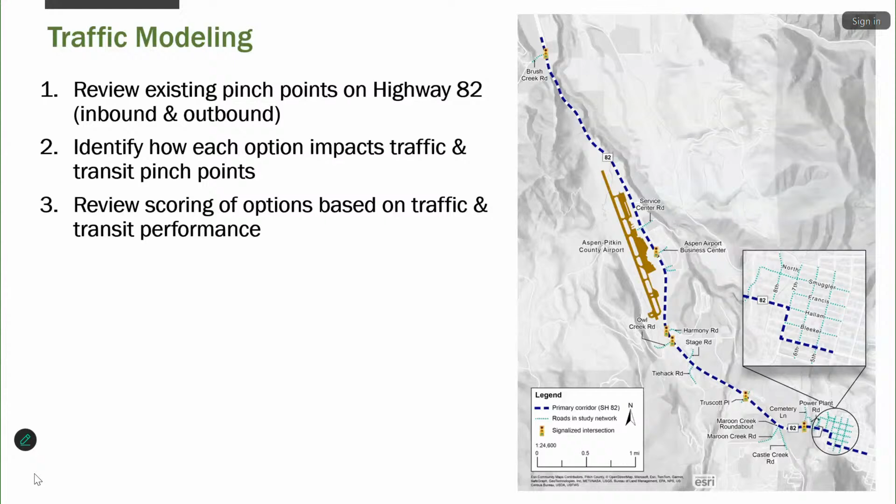So exiting downtown Aspen, going from right to left on this slide, the first primary bottleneck is a 1-lane merge after crossing 5th Street, which combines general traffic and buses into a single lane. This mixed traffic continues at a slow speed with several minutes of delay until hitting another 1-lane merge where the bus lane again begins slightly past the Maroon Creek roundabout. This 1-lane merge is the most critical outbound bottleneck due to the additional traffic demand originating from Cemetery Lane, Maroon Creek Road, and Castle Creek Road, all merging at the roundabout to leave Aspen.

Shifting our focus to the inbound direction, this queuing occurs across several morning hours. As general traffic enters Aspen, the first and most constraining pinch point is located where general traffic merges into a 1-lane section near Harmony Lane in order to accommodate the inbound bus lane that begins around the airport. Inbound traffic and buses merge again at the roundabout and continue to move at a slow speed until going through 2 90-degree turns at the S-curve. This 1-lane merge near Harmony Road effectively meters traffic and allows buses to continue free flow through heavy queuing.

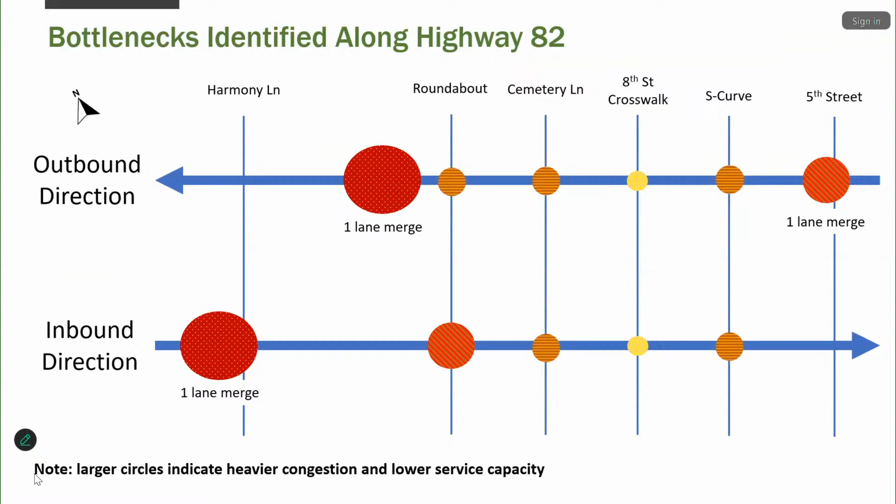Okay, can go to the next slide then. Option 1 primarily provides transit lanes through the S-curve as Highway 82 transitions from Hallam Street to 7th Street to Main Street. It also features slight modifications to 7th and 8th Street access to and from Highway 82 to help alleviate some of the friction through the S-curve for general traffic and buses.

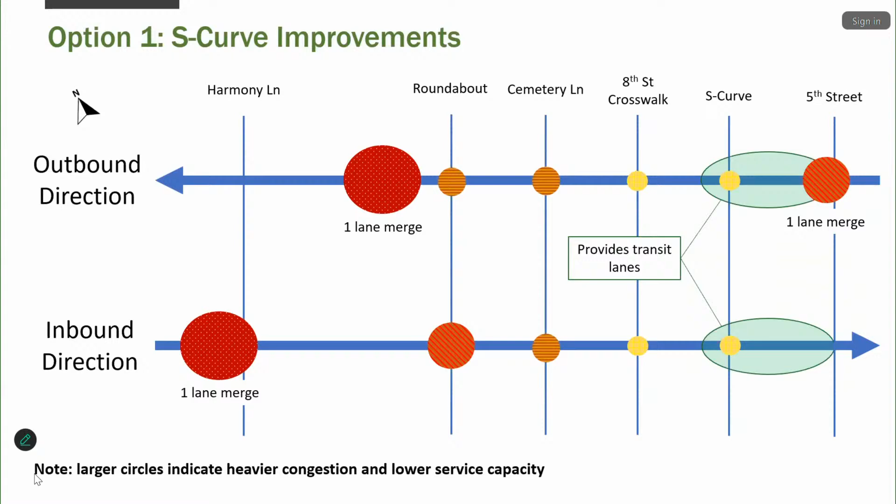Option 2 builds on option 1's transit lanes through the S-curve and extends the bus lane in the outbound direction. Option 2A extends bus improvements to Cemetery Lane, while option 2B extends bus improvements through the roundabout with a bus bypass. Note that separating buses from general traffic also helps general traffic flow slightly better.

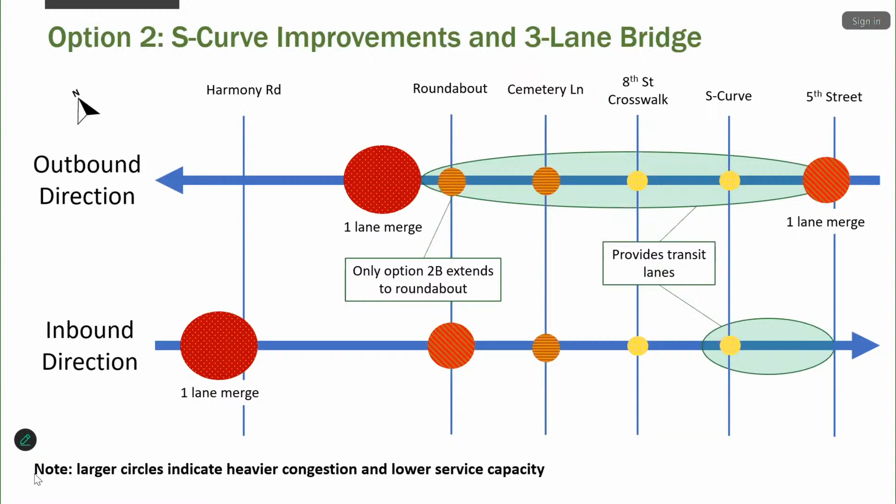Option 3 is the Phase PA, which removes several pinch points and adds transit lanes between 5th Street and the roundabout. The Phase PA also features a signal at 7th and Main Street, which is effectively a relocation of the signal at Cemetery Lane. Notice that the pinch points that the Phase PA removes are not the most critical and constraining bottlenecks, so general traffic conditions do not experience drastic improvement under the Phase PA as it's currently designed.

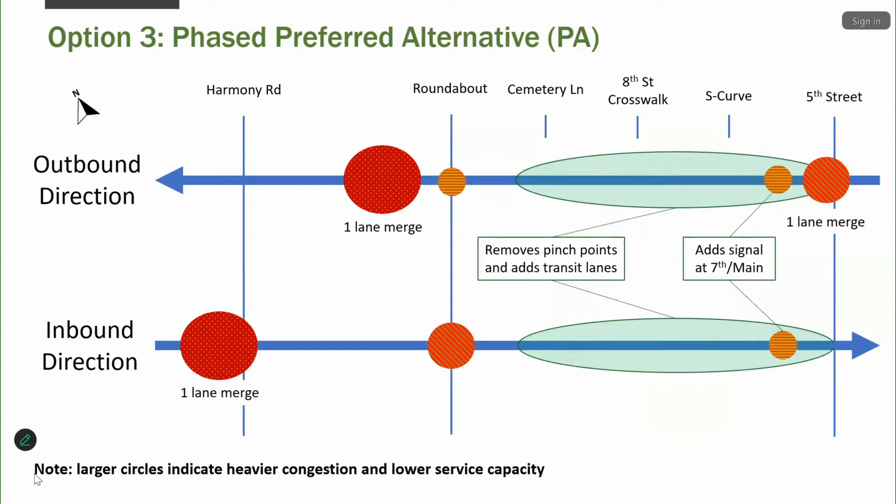However, there are strategies that could be explored to provide more traffic capacity for this option. Option 4, similar to the Phase PA, the split shot option removes bottlenecks in the inbound direction. Contrary to the Phase PA, it maintains connections to those existing bottlenecks for the outbound direction and softens the S-curve as well. Notice that roundabout queuing is worse under the split shot, but note that there are other solutions that could be explored to improve split shot operations.

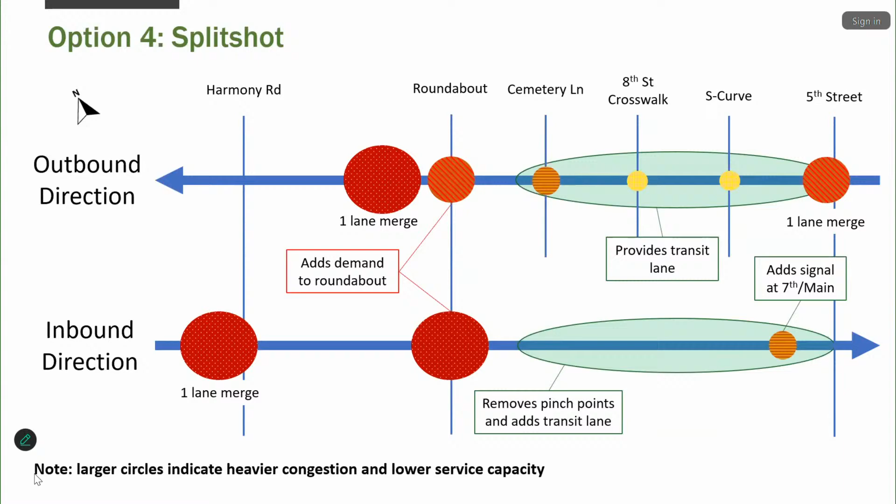Option 5 considers down valley improvements to the northwest of the limits of options 1 through 4. The primary strategy considered here was to improve conditions in the outbound direction, primarily due to the impact that outbound traffic has on Aspen streets and community.

This solution explored converting 0.4 miles of dedicated bus lane to a general traffic lane, in an effort to continue two general traffic lanes further north of the roundabout to increase the outbound throughput of the Maroon Creek roundabout. It's important to note that this would require a supplemental EIS at minimum.

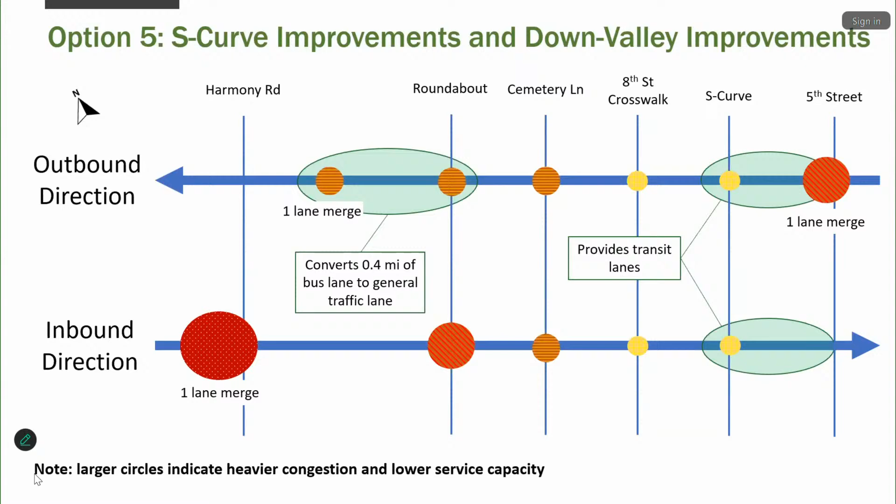To summarize traffic and transit performance of the options discussed, our team scored each option's effectiveness in addressing existing and future congestion issues. The scoring is on a scale of 1 to 5, with a score of 3 performing similar to the no build, a score of 1 to 2 performing worse than the no build, and a score of 4 to 5 performing better than the no build.

Option 3 scored the highest due to the removal of existing bottlenecks in both inbound and outbound directions. Option 5 scored the next highest due to its effectiveness in reducing outbound traffic congestion, thus improving bus travel times as well. Option 2B scored the next highest, followed by option 2A, then option 1, and finally option 4.

The split shot performed the worst due to its negative impact at the Maroon Creek roundabout. However, again, there are potential solutions available to investigate improved split shot operations. There are numerous variations to all of these options that can be considered to improve traffic and transit even further. This exercise was an initial look at roadway operations, and now that we have a traffic model available, future testing can be performed efficiently. If the council wishes to explore more variations, that can be done through a supplemental EIS.

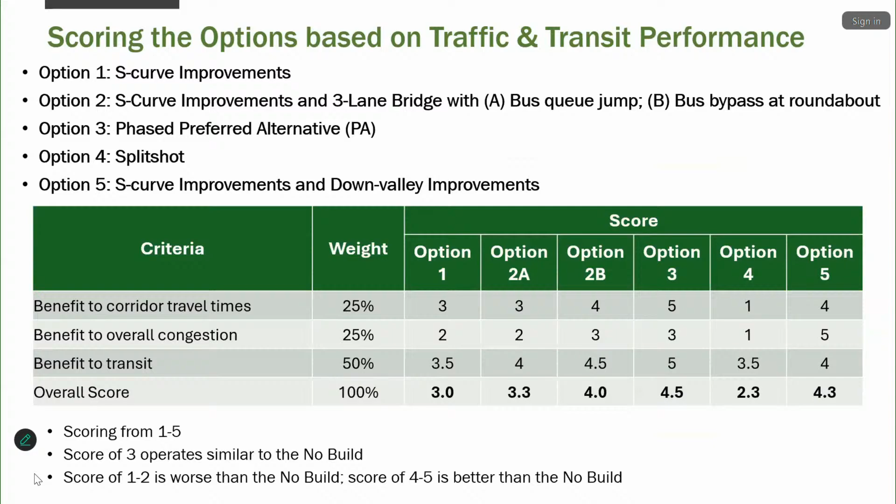Question there. Thanks, this is helpful. Could you remind me, option 5, what's contemplated with the bridge in option 5? The existing Castle Creek Bridge.

So this would only include the S-curve improvements associated with option 1. It would still have a 2-lane bridge. Maintained a 2-lane bridge. Thank you.

And I believe you said that a supplemental EIS would be required in option 5. Could you help me understand why that's the case if we're keeping the status quo? It would be due to the removal of that 0.4 miles of bus lane just beyond the roundabout, down valley of the roundabout. Down valley, thank you.

John, can you tell us how long a supplemental EIS would take? Well, I think it depends on the extent of analysis and how much public involvement might be required, but I think a good estimate might be between 1.5 to 2 years.

Thank you. You can hold your questions till your comment time. Thank you so much.

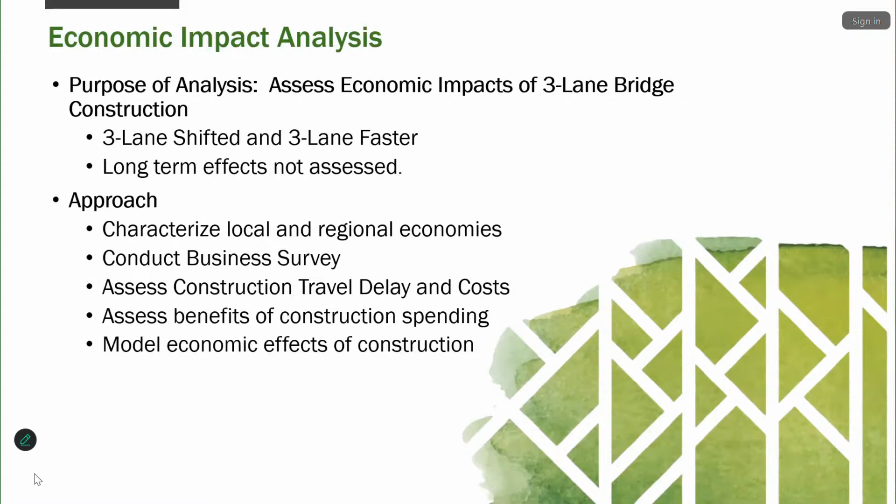Our approach, in short, involved characterizing the local and regional economies, conducting a business survey, assessing the travel delays and related costs, the benefits of construction spending, and modeling the economic impacts of construction. We'll talk about each of those in turn.

Starting with the business survey. The purpose of the survey was to get feedback from the business community and to help inform our economic model, which was an IMPLAN model. So we partnered with the Aspen Chamber. They were very helpful in helping us get out 100 surveys to business owners via email. City staff also helped by pounding the pavement and talking directly with businesses, reminding them to complete the surveys.

And we got good responses, 42 businesses responded. So I'll just go through the high points of some of the results. The more complete survey results are summarized in an appendix to our economic memo. But just to hit the high points, in terms of the types of businesses that responded to the survey, highest was retail at over 32%, followed by the food industry at 15%.

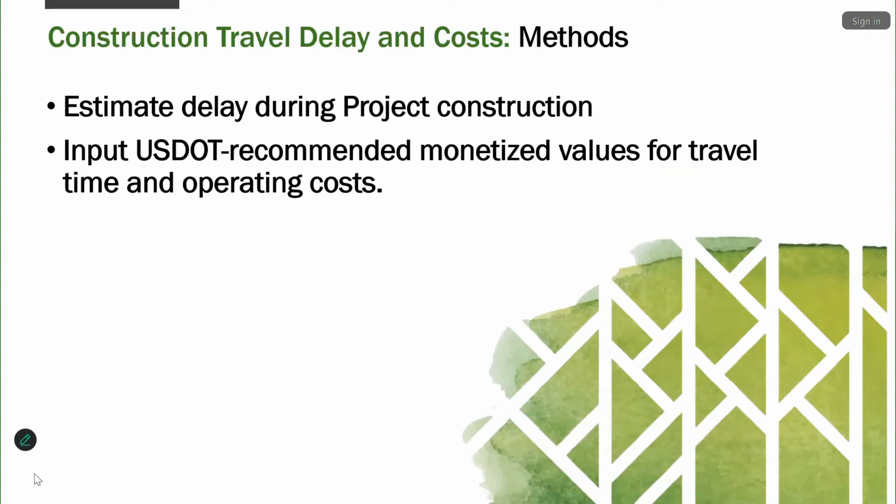So in the larger scheme of things, minor effects. But when you take a look at that over the span of a 3 or 4 year construction period, those delays do add up. We used USDOT methods and values to monetize those travel delays.

And the results you see here. These are annual numbers, vehicle hours traveled. They would total over 185,000 vehicle hours traveled of delay. When you monetize those, for both the 3-lane faster and 3-lane shifted alternatives, total values for the 3-lane faster option equate to over about 14.7 million, whereas the 3-lane shifted is approximately 19.3 million. The differences really are the result of the difference between a 3 or 4 year construction project.

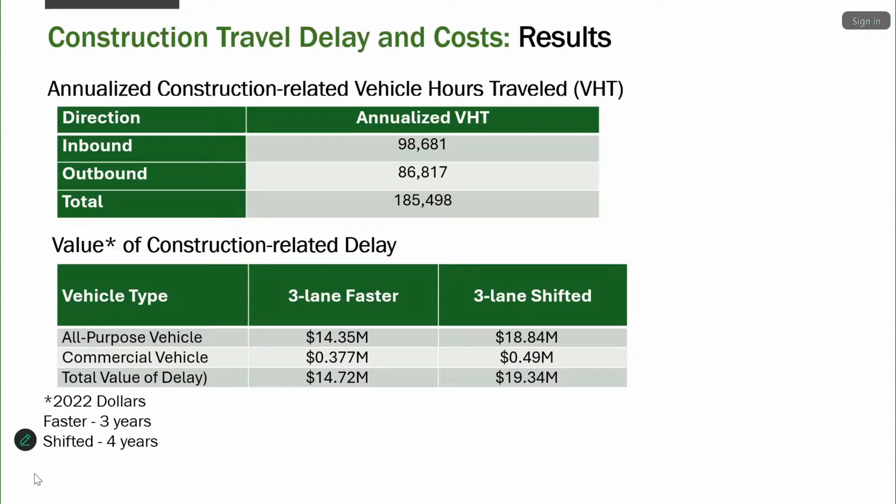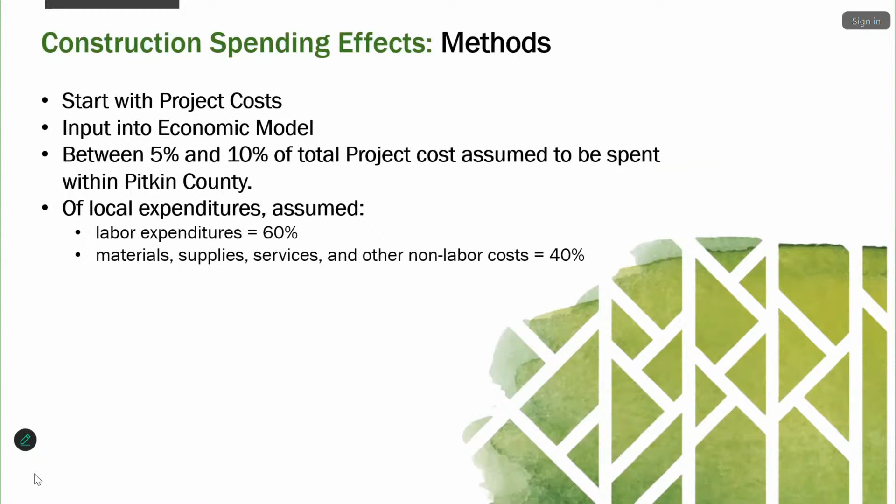With the influx of construction spending, there would be a benefit to the regional economy, which we define to be Pitkin County. We inserted the project costs into our economic model. We had to make some assumptions about the extent to which those project costs would be spent within Pitkin County, including Aspen, and we assumed between 5 to 10%. Thinking in terms of where the labor might come from, where the materials and supplies might come from. And of those local expenditures, we assumed 60% would be labor versus 40% for materials, supplies, et cetera.

So totaling those in terms of annual benefit, we equated that to 20 to 30 full-time employees for the 3-lane faster option, which would result in labor incomes between 1.3 million to 2.6 million, and for the 3-lane shifted, 10 to 20 employees, with labor incomes of 0.84 million to 1.67 million.

Lastly, we looked at the extent to which construction activity might reduce business activity. After some discussion and deliberation, we assumed between a 2 to 5% reduction. This shows the scale to which that extent of reduction would affect overall business activity, focused on tourism-related businesses, in a broad sense, including real estate, accommodation, food industry, et cetera.

So when we run it through our economic model, we came up with reductions of full-time employees between 180 to 450, which are notable, and that equates to labor incomes between 11.1 million to 27.8 million. I will note that based on discussions with our economists, we felt that the reductions would probably be more toward the lower end, closer to 2% than 5%.

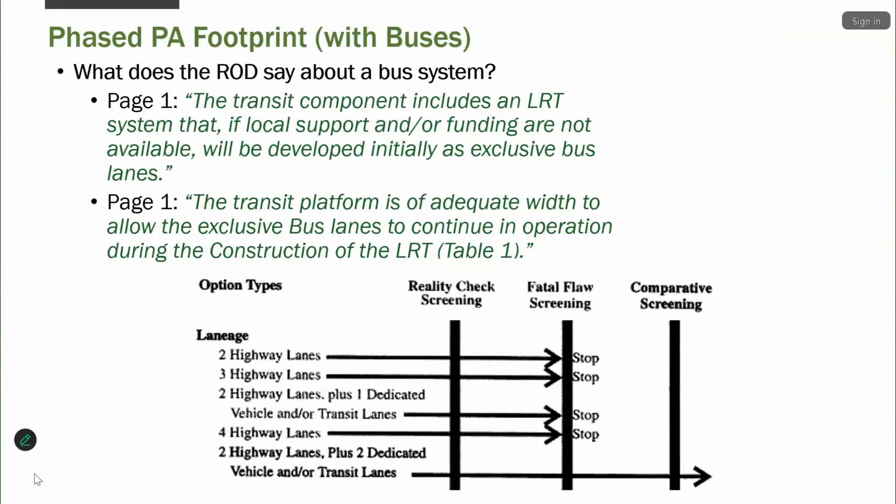So if we took a look at table 1, this is key on the platform widths, all right? And I want to reiterate that all these platform widths are maximum widths, okay? So it says 93.5 feet from Maroon Creek to 7th, basically from the roundabout to 7th. That's including a light rail component. 78.5 foot for cut and cover tunnel.

They wanted a little extra width in there for an emergency walkway if an LRT system was built and brought through that cut and cover tunnel. And then 73 feet for the Castle Creek Bridge. So again, I highlighted kind of those dimensions on table 1, and it also notes down the bottom there that for the phasing of the LRT, the bus lanes are provided so that we can adequately build that LRT. So there was always a plan to allow for buses to be phased.

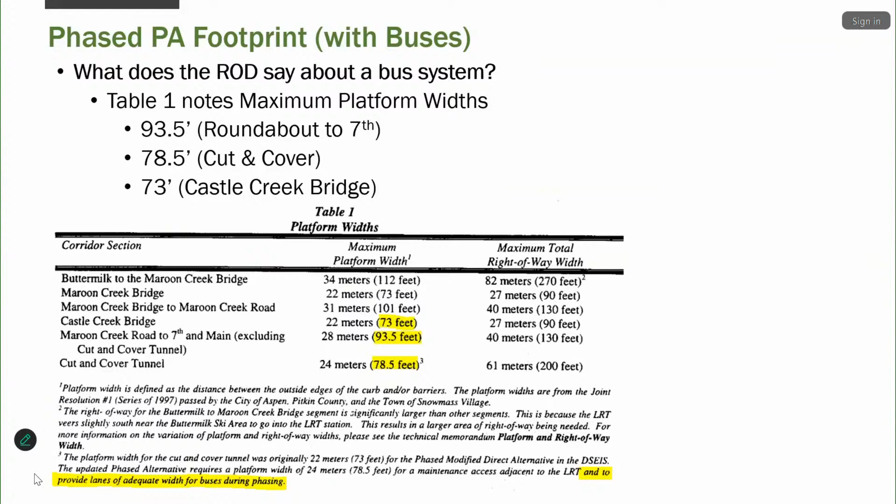Next slide, please. I want to also say that those platform widths, we narrowed them up for the phased PA that we presented to you last Monday. So for that roadway component that I mentioned was 93.5, we've narrowed that up to 75 feet, okay, for what the phased PA width for the roadway. But we kept that 78.5 foot, and we would keep the 73 foot for the Castle Creek Bridge, that's not shown on this figure right here.

This is consistent with phasing the buses in the ROD. It's also consistent with the July 10th letter that CDOT provided with FHWA's concurrence that we can narrow this up. Now, you might ask the question, well, what's this going to look like if we do build an LRT system? Are we going to wind up with all this extra pavement? Well, no, we would come back in there and probably make a wider median and maybe even slice off some of the pavement on the outside edge and bring it in a little bit and restore that back to more open space. So just kind of walked you through that, but we feel like they left enough interpretation in the ROD to help phase this, but the maximum widths help that, and we can narrow that up some.

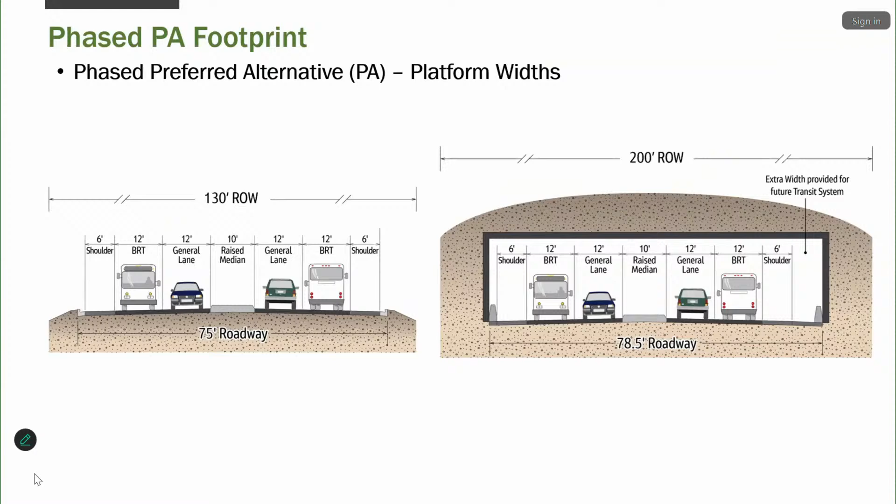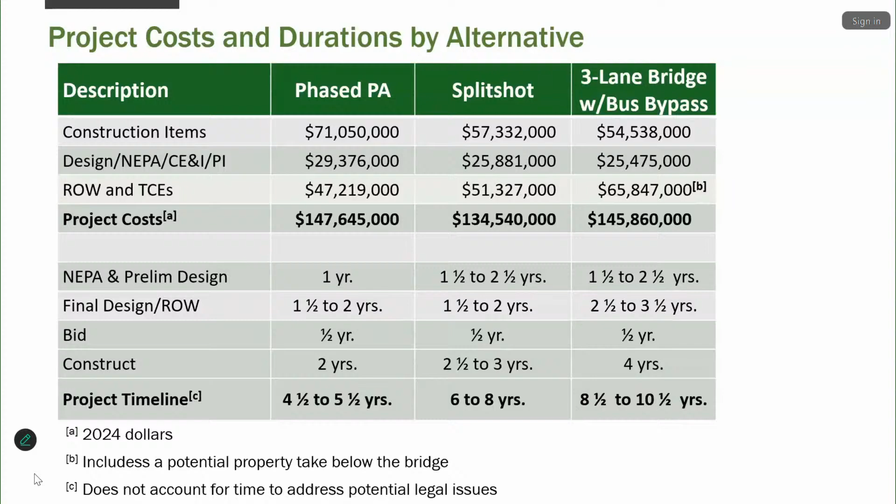Yeah, with the NEPA duration, as mentioned, for an SEIS I'm estimating—spitballing—1.5 to 2 years. The 2.5-year estimate there is in the event of a new EIS, which, as we know from the CDOT responses, is a possibility.

I think the additional right-of-way duration is just due to the number of properties and the amount of right-of-way relative to the other options. Thanks. Thanks.

Bill? Thanks, Carly. Did you model the evacuation time frame under the other scenarios, like the preferred alternative or 3-lane option, et cetera?

We have not. We've been using this as a tool for existing conditions and existing evacuations. The scenario has been scrutinized and pieced together with input based solely from the emergency responders.